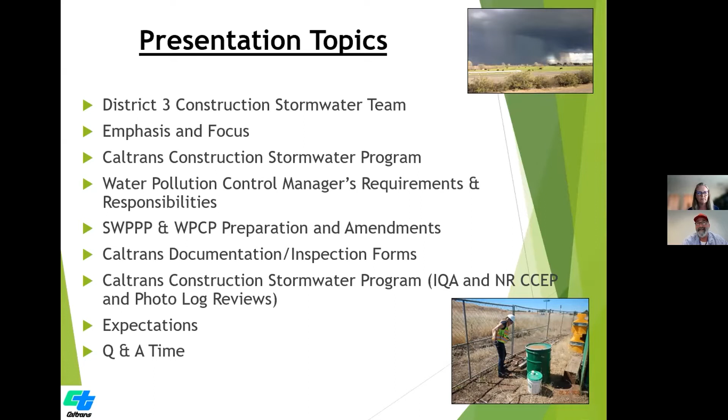So basically, the District 3 team that Dusty runs, Dusty's the boss, La Jefa, is a team of people that all work together, and we look at all projects in the whole district, stormwater SWPPP jobs under the CGP that disturb an acre or more of soil, as well as water pollution control program projects. Now, the WPCPs are under the Caltrans permit and SWMP requirements. So we take the same approach for temporary BMPs as they build those jobs.

But basically, Dusty runs the show. She's been doing it in D3 for a long time. Deanna Arrigo works for SOMAS, and she is the documentation smart sorceress on the computer. So she does a lot of the data entry and uploading in all the SWPPP projects in District 3. Chung Fu does all the water pollution control program projects in this district. I assist, Paige Martin assists doing inspections on projects, and Janet Sager does photo log inspections on the jobs. And those are photos of us in the field, in action.

But basically, the emphasis and focus is that the water pollution control manager either works directly for the contractor that won the job, or is hired as a consultant, as a sub vendor to the prime. Basically, that water pollution control manager, you run point. You are responsible for properly implementing that approved site-specific SWPPP or WPCP for the project.

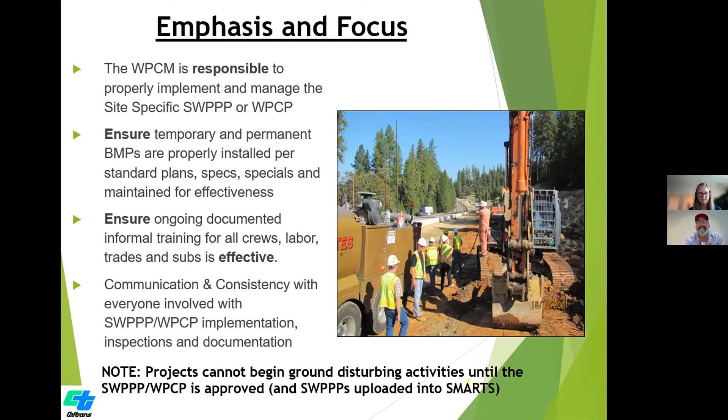Basically, the program is that the resident engineer and the construction stormwater coordinator will review and comment on the submittals. So the contractor won the job, they have to turn in submittals, and one of them is a SWPPP or WPCP, depending on the project. We'll review that and comment on it and do as fast a turnaround as we can so the contractor can get to work. But we want a good site-specific plan.

We will attend pre-construction meetings and go over the water pollution control items and compliance expectations. And we recommend that the water pollution control managers, you guys that are hired by the contractor, attend those meetings as well, that you perform weekly inspections, informal training, and document all the submittals when you do them every week, and that you turn them in to the resident engineer so we can put them into category 20 in good time.

The spec says that when you do a SWPPP inspection, you turn that report in within 24 hours after the inspection is completed. So we say, hey, every week, at minimum, get the packet of all your documentation in, so we can review it and put it in category 20.

Basically, you guys perform pre, during, and post inspections per the spec, per the permit language, to ensure that the training is done and all the documentation is very thorough and accurate and reflective of site conditions. And we need to make sure that the SWPPP or WPCP is properly implemented and amended when required and when needed, ahead of the contractor changing things.

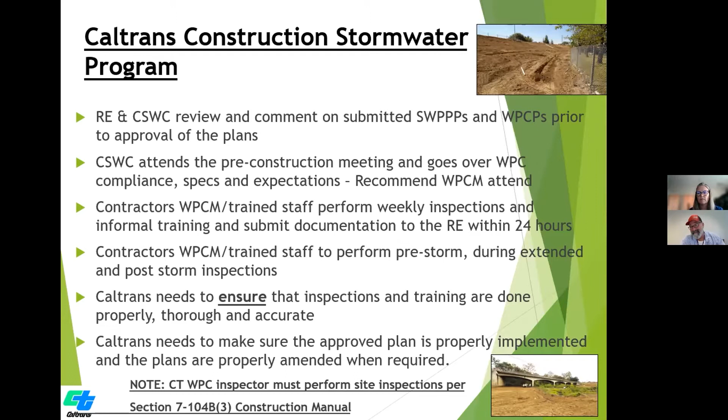The resident engineer will assign an inspector to look at all the items on that project. And one of those items is water pollution control. They're to do inspections too. So we always drive home: get a good working relationship with that assigned inspector on your project and do it together, walk and talk about deficiencies, because they're supposed to review that submittal and then say to the RE, hey, that looks good, go ahead and sign it and put it in the category 20 files.

The most successful projects that we have, it's a collaborative effort. It's the sub or whoever the QSD water pollution control manager is, the contractor, the prime, and our staff and our team that goes out and assists with compliance. And we had a really great team that collaborated well, because it's a team effort. It is, definitely.

Basically, all these bullets are right out of the standard specifications, the 2018 revised standard specifications. The water pollution control manager's responsibilities: basically you have to be a minimum of a current QSP, qualified stormwater pollution prevention plan practitioner, and you have to attend an 8-hour Caltrans certified water pollution control manager training class. So that's new as of that spec.

The revised spec was April of 2020. It's being required on all projects that went out to bid past that date. And so you have to have that. To draft a SWPPP, you still have to be a current QSD, but to be the manager to implement it, you have to be a current QSP as well as have that certified class.

You guys have to read and understand and oversee and implement those site-specific plans. The water pollution control manager can delegate duties, but you have to ensure that you've trained that person, that they've had the 8-hour class as well, that they know what they're looking at and submitting to you as a manager that you're going to review and sign off on that it's true and accurate, then submit it to Caltrans.

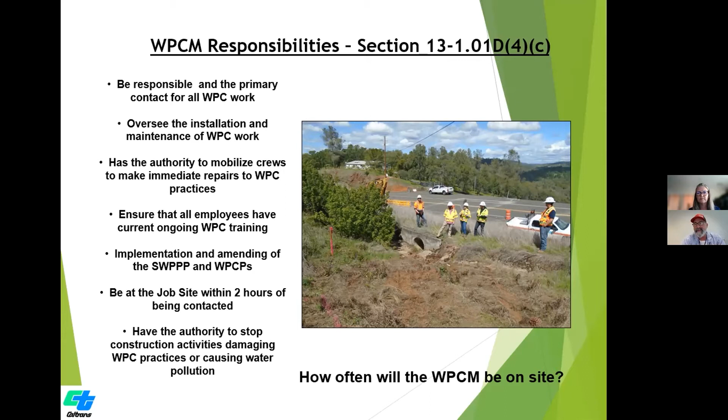Oh, Dave, you muted yourself. I didn't hit anything. Hold on. Maybe it was a cable. You're back. You're back.

Again, continued, understand the importance of permit and contract compliance, timely documentation submitted, reflective of site conditions. All deficiencies are listed and completed in the corrective action summaries within the required time frame. So if you look at the specs, there's a spec on deficiencies and how fast they need to be fixed. The current permit, CGP, says you identify a deficiency, you have 72 hours to begin fixing it and then finish as soon as possible. The adopted new permit does put a definite time limit on it. And in the Caltrans spec and required text of the site-specific plan, it says you have 5 days to correct that deficiency and submit the paperwork to the RE.

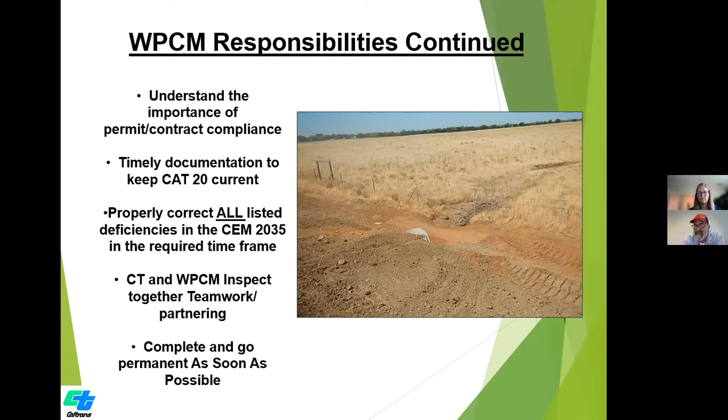And then if they are reoccurring deficiencies, there's your weekly informal training topic every week to drive it home, to raise the bar of awareness on your job site. But basically inspect together with the Caltrans inspector, teamwork and partner, and then complete areas of a job as soon as you can. And if they phase the work really nicely, finish the areas, put the permanent in, and we can submit a change of information to reduce the size of the footprint of that job. Makes it easier. And that's what the water board, the regional boards want to see.

Okay, so the REs have 3-week to 1-month look ahead meetings with the contractor. So go to those, say, hey, I want to go to those meetings. Because the contractor works under a CPM, critical path method schedule, which changes day to day. So they're going to bounce around all over the place. So if a good water pollution control manager goes to those meetings and hears where they're going and how they're shifting gears on the schedule, then they can be there and say, hey, you're going to need these BMPs here ahead of that item and during that item work. So you want to stay ahead of that schedule, the water pollution control schedule.

That's critical, Dave. That's critical for the project to be in compliance, especially as it's growing or shrinking, that the prime is keeping you as a water pollution control manager informed of where their next site or next location or next activity is going to be, because many times there should be perimeter controls or things in place before they go in there and start creating DSA. And sometimes this is one of the areas that could use a little bit of work. So that collaboration again is really critical.

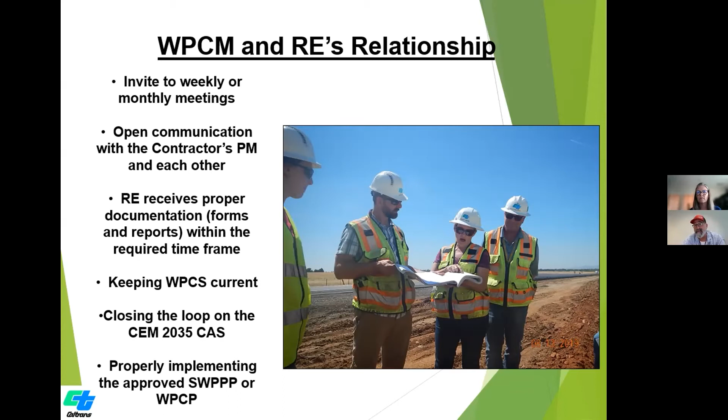You have to gain a real-time relationship with the resident engineer, with the Prime's project manager, and the assigned Caltrans inspector. And then use us as a resource. You know, we're there to help because we do inspections monthly on those SWPPP jobs. We're a resource, but definitely go to your water pollution control manager first. Yeah. Sometimes there'll be a little bit of skipping.

So we're here to help, even though we do inspections and rate a green, yellow, or red rating on a job. We're here to help. And sometimes there's some complex challenges, and so it requires us to step in and assist with coming up with that plan, right?

So if you're a water pollution control manager for a Caltrans job and you're drafting a site-specific SWPPP or WPCP, use the latest manual. Caltrans has a manual for everything and forms for everything. You get on their website, use the latest one. It's the October 2016 manual, but the templates are updated. The latest SWPPP template is March 2021.

It's Microsoft Access. You need that Microsoft Access software 2007. The new WPCP template is in both Access as well as FileMaker Pro 12 program, and that is June 2021. So there's the website link. Get on there and download the latest manuals and download the latest templates to use to draft your site-specific plan.

The WPCP template, we have new boilerplate templates for certain types of jobs, a chip seal overlay, electrical work only, or paving overlay. There's 7 boilerplates and they're on the website. I think my next slide shows you those. But the WPCP is for anything that disturbs less than an acre of soil. You have to use the WPCP template.

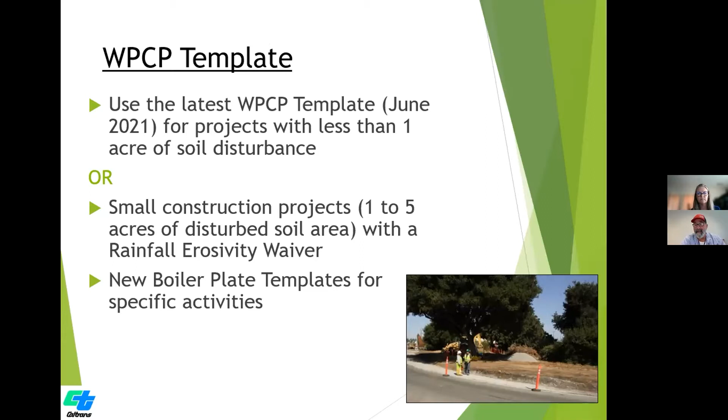Or if it's a job that disturbs 1 to 5 acres and it's one season, it's nowhere near any receiving water, and it can apply for an erosivity waiver through SMARTS and gets accepted, then use the WPCP template. And then here are the latest boilerplate templates down at the bottom of the slide. If your job is just pavement overlay, use the boilerplate WPCP. A slurry seal, chip seal, use the boilerplate template.

Striping, these photographs are for a striping project. Just use that boilerplate template and pull it up and insert your site-specific information, and it speeds up the process of review and comment so that you can get to work right away. And these are new. So they're June of 2021.

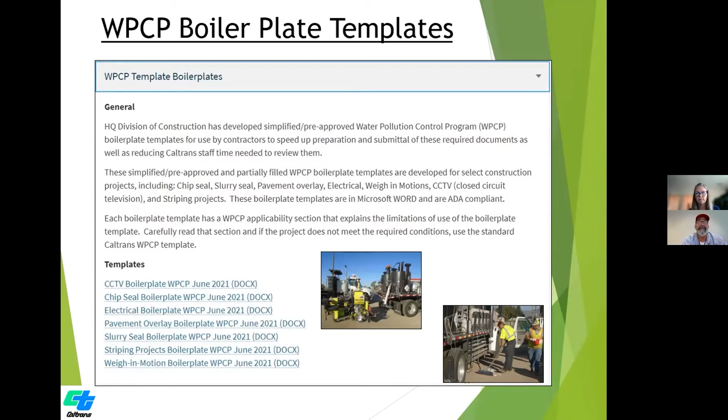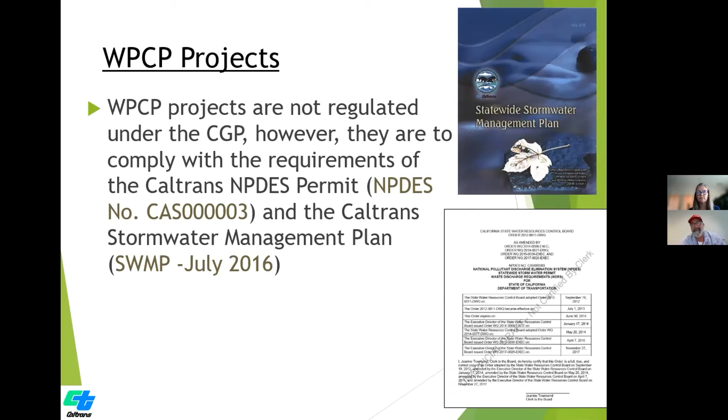Water pollution control projects, they're not regulated under the CGP, the Construction General Permit, but they are regulated under Caltrans' own NPDES permit and Stormwater Management Plan / program for the whole state, as well as any potential other regulatory permit, a 401 certification, a Fish and Wildlife Streambed Alteration Agreement, or an Army Corps permit. Or if you're up in Tahoe, a TRPA requirement, agency permit. So know your contract documents and know what every permit applies to your project.

So basically, the SWPPP, what we see is common deficiencies. When we review plans, we see they're not site specific. There's not detailed BMP narratives. It should be a standalone document that you can give to someone that knows nothing about temporary BMPs, and they can read the narrative and look at the drawing and the fact sheets and reference material to say, okay, I know where this goes. I know what it's for.

So you always want to take that who, what, when, where, why, how approach in drafting site-specific BMP narratives for that job site. Reference the drawings, cross-reference it. Everything should run smoothly through that plan. Include verbiage from the BMP fact sheets and the standard specs, but use it and massage it to be site specific to that job. So cutting and pasting is fine, but you got to proofread it before you submit it. All right. So make it site specific, but yeah, definitely do that.

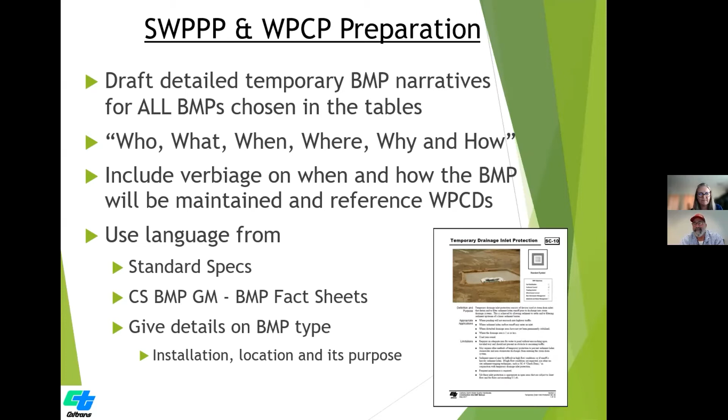And so that it minimizes the amount of comments and the turnaround time, because contractors just really want to turn and burn, basically. Let's roll. So cross-check that information from section to section. Detailed narratives, we can't drive that home enough. But yeah, definitely review it.

Use the buddy system if you're drafting it with someone that you work with to read it, get more sets of eyes on it. And then you're going to turn that into the prime. Tell the prime, hey, read it before you give it to the Caltrans RE to see if we've missed anything. So we can't stress that enough.

So more common deficiencies is your certification, the QSD that drafted it. They put that in an appendix and it's expired. So you print out your current certifications to submit with those plans. Use the proper template. Use the most recent template because you don't want to do all this work and then the first comment gets kicked back and say, well, put everything in the most current template. So you want to make sure you use that.

We don't like to see things to be determined. No, you're drafting it. You determine it now, and then it can be amended. You make the decision, you commit to it. Then as they start working, amendments can be made to these living, breathing document plans, both SWPPPs and WPCPs.

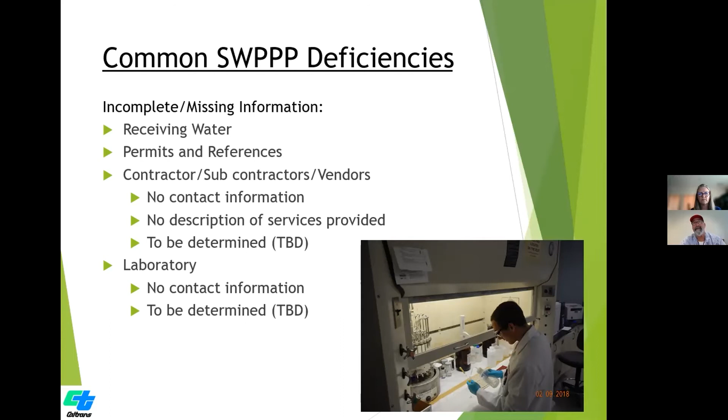It doesn't identify all the BMPs that were selected, or it talks about BMPs that aren't even related to the project. So if there's work over water, but it's a chip seal overlay job and there's no bridge anywhere, right? So again, cutting and pasting is fine, but proofread to make sure it is site specific and go through those special provisions and all the items of work and what temporary BMPs relate to those items of work

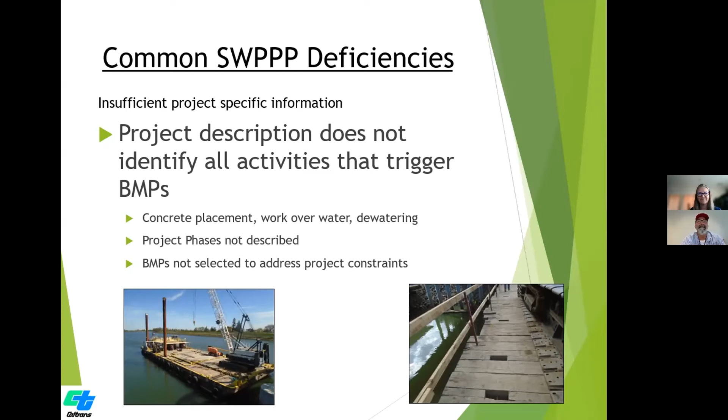and make it very site specific. Because we've seen it all over our 20+ years of reviewing plans, the jobs in District 3 up in Tahoe area or in Truckee, but yet they're referencing a weather station in LA. And we've seen it. So basically, make it good and site specific. And there's some pictures of work over water.

Schedule, make sure the schedule, okay, in the SWPPP and the WPCP sections of those plans, it describes what is needed in the schedule and in the drawings. I think it's section 500.5 of the SWPPP and 500.6 of the WPCP from my memory of what needs to be in those schedules and drawings. So we review those and make sure the schedule has everything. Work windows from other permits, start dates, end dates, BMPs, all the items. If you use a critical path method schedule, you can tweak that to add the temporary BMPs along with those items.

Can I say real quick, Dave? Yeah. One thing, you don't have to tweak your CPM to do that. We in District 3 have a pretty scaled back version of that we offer to anybody that asks to get a schedule, because sometimes the BMPs get lost in all of the items in a CPM or something like that, and they can get skewed and moved around. So if you guys work in our area, we have a very scaled back version that you can utilize that is very specific to BMPs and stuff. Yeah, and there's all forms that we've seen, but I was just saying, if you use that to tweak.

Yeah. But definitely we want a good schedule, an accurate schedule, start, end dates. Again, you guys as managers drafting these plans, especially SWPPPs, for the risk level determination. If the schedules change and blow out, it could kick you into a different risk level for SWPPP jobs.

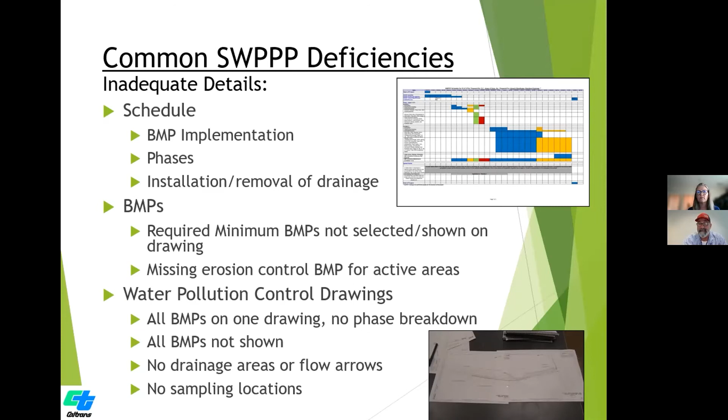If you guys have to use an off the right of way staging area or yard solely for a job, before that happens, you need to submit to the Caltrans resident engineer a written authorization from the property owner to the contractor, allowing the contractor to use the private property and holding Caltrans harmless of any and all liabilities before it happens, before they use the staging area.

So basically for deficiencies, we see a lot of generalization. We don't like that. In general, depending on, to be determined, a BMP narrative is one sentence: we're going to do this per fact sheet WM5. Done. So no, we want more site-specific narrative of BMPs.

And a big one is "as directed by the RE." We see that a lot. No, as directed by you, the Water Pollution Control Manager, because if you didn't draft it, you're implementing it. So never write in a plan "as directed by the RE."

The contractor won the bid and they're going to build the job how they want to build the job to the contract document. The only time Caltrans, the RE, directs work is under force account. And those are emergency jobs, and very rarely do we do work under force account. Right, Dusty? Correct. All right.

So basically proofread before you submit. Make them site specific, proofread it, have many sets of eyes on it after you're happy with it if you're drafting these. Check that you've chosen all the BMPs against the special provisions and the bid items, and that all the tables in the templates that you've checked have a narrative for it. Draft detailed narratives. Discuss maintenance of the BMPs in the narrative, but be site specific.

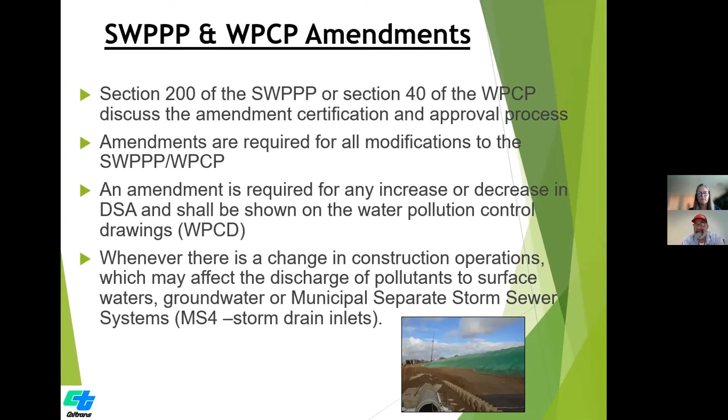Here's some examples. Adding an equipment, storage, or laydown yard that's new, it has to be amended before it happens because Caltrans Environmental needs to clear it, right? So archaeological, bugs and bunnies, they need to say, okay, you're good to go. Before it happens, because a lot of times it happens and they're like, oh my God, there's the Douglas iris or the red-legged tree frog you just squashed, right?

We don't want that. Adding or replacing subcontractors, replacing a water pollution control manager, adding new BMPs that you thought you didn't need, but now you're going to change a BMP, add a BMP. Changes in amounts of disturbed soil area and locations, and moving sampling locations. We need amendments.

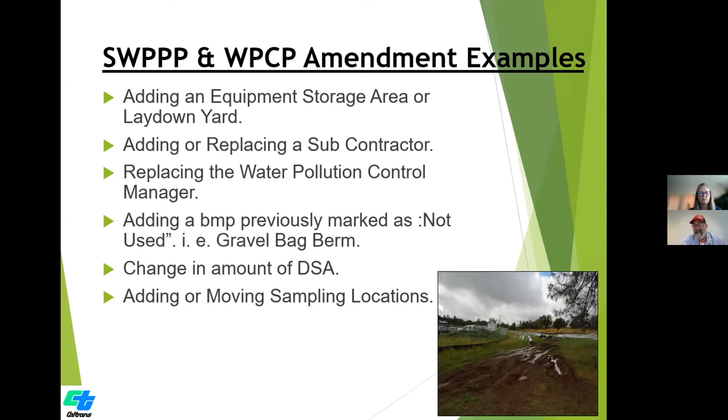So that's a process that you want to do before. So go to those monthly look ahead scheduling meetings. You're going to find out where they're going to go and where they're going to work, so you could be ahead of an amendment for sure. That's another good reason.

Or at a minimum, have your prime send you the look ahead schedule so you can peek at it and have questions. A lot of times it's in-water work, summertime stuff. It's a lot of in-water work, dewatering. Some of those things need extra permits too, so they take time.

And then you have an amendment CEM form. We have a form for everything. So you're going to do an amendment log and a CEM 2008 and 2009 form, get those submitted, reviewed, and commented on before it happens in the field. You need to amend it in writing before it happens, ideally, or we're playing catch up and we're surprised in the field when we go do our review.

But if there's an imminent threat of discharge, then a verbal approval is required, and then the paperwork can follow if you need something to happen right away. Right, Dusty? Oh, sorry, I was just seeing the question.

A discharge to a DI would require an amendment? Technically, we shouldn't be discharging. Well, wait, I'm not sure about this question. A DI that wasn't already listed is protected in a project footprint, and it's potentially a new location? Yeah, in that case you would add it, right? Yeah, because currently in the drawings and in the plan, you're protecting drain inlets that would be shown on the drawings, and then you're cool. But if it's a new area, a new system that wasn't there, then yes.

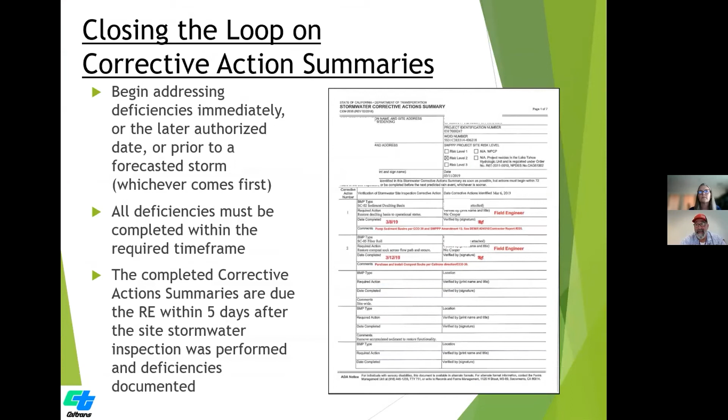Thorough, accurate, and reflective. But basically you're dating when the finding was observed on the inspection, and you want to close that loop, sign off that it's been fixed within those 5 days or prior to a forecasted rain event, whichever's first, which is in the Tahoe permit and spec language as well. And I think the new permit's going to state that as well.

Again, you look at weather, look for potential discharge. As a water pollution control manager, you're going to prioritize your deficiencies and getting them fixed, taking into account the time of year and the weather, and is there a potential threat of discharge? And remember, no carryovers. If you fix it, but then you start seeing the same issues, there's your weekly informal training topic to drive home to the labor and the trades on the job to say, hey, you guys aren't getting this.

Let's get it together. Hey, Dave, can I interject a question? I actually put it in the chat, but I know in the ideal world, we don't want carryovers. Yeah. But sometimes the fix is going to take longer. Sure. They need to get the erosion control contractor out there to spray something down, or there's a scheduling issue, or there's other things preventing it from happening. So it is quite common. We see carryovers happening. So how should the numbering work? How does that CEM 2035 work?

Okay, John, that's a great topic and a great point. Document that. So if something like scheduling, this needs to be sprayed and stabilized, and this subcontractor is booked and we can't get them out until this date, you write that down to say this is on the schedule to be sprayed at this time, right? So then like, okay, we're cool with that.

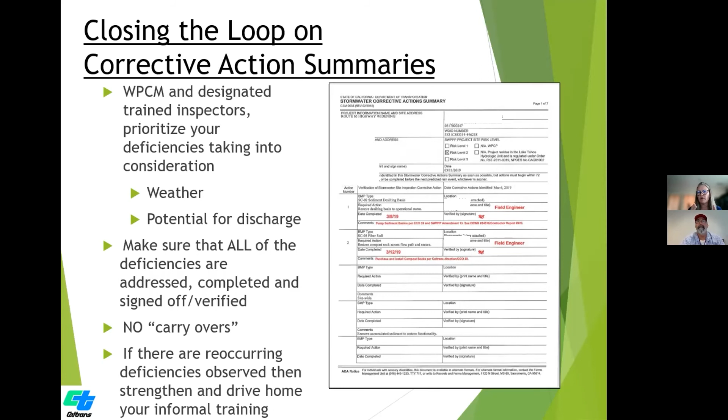I don't want to pigeonhole you into something, you know what I mean? So I just encourage you to talk with that group and you guys come up with a plan that works for you guys. That way it's flexible. Right, and so that could work, keeping it the same number or doing something different and changing the number. Yep. And sometimes on these big jobs, they'll do like a month and a finding for that month. And then you can track it that way. Thank you.

So basically Dave, you had one other question. I don't know if it's okay if we answer them as we go. Who signs the corrective action form? Walter. I think Walter works for us, if it's the same Walter. He's probably coming from a slightly different perspective because they do encroachment permits. But for what we're talking about under the CGP, that would be the QSD and the water pollution control manager. And then the RE would sign off when they agree that they're complete.

And the contractor. Yes. Is he on there too? I can't remember because there's so many different signatures. Yeah, usually the signature page will have the resident engineer sign, the contractor, and the water pollution control manager. But they all have to be signed. And it's funny because all these CEM forms have the instructions on the last page, not the first page. So go to the last page, read the instructions, and then fill out the CEM if you have questions.

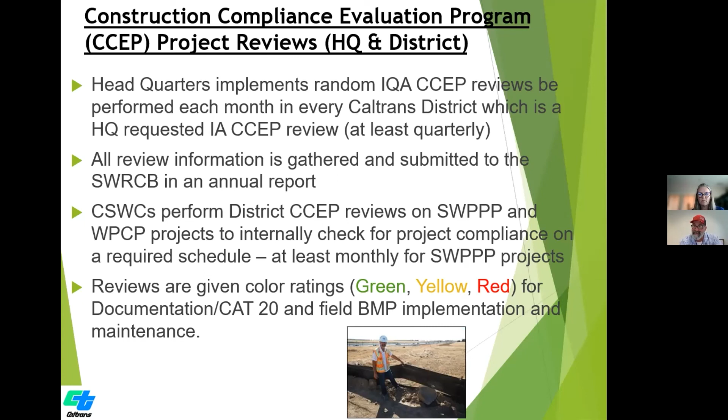So when you see us out there and you get a red, yellow, green, we're looking at the document review and the temporary BMPs, and we inspect to the standard spec and plan, T drawings, the permit language, and the contract documentation, and we reference it. This is out per this. This isn't maintained per this. And you guys should inspect the same way, inspect to the contract language.

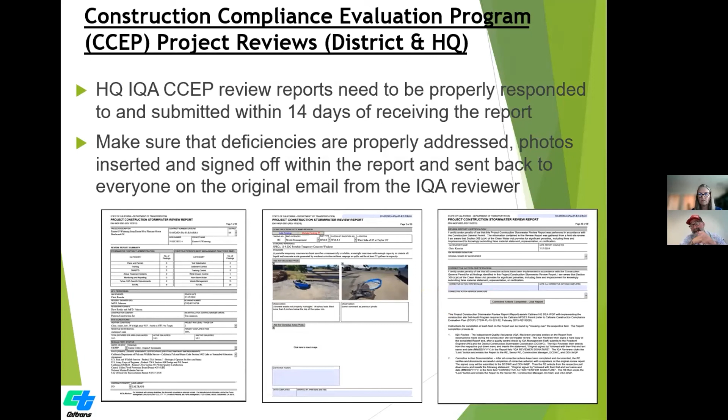And this is headquarters IQAs. So when we do it, you have 5 days to fix it. When headquarters comes out and does a review, they won't give you a red, yellow, green. They'll take a picture. They'll say this finding or deficiency is out per the permit language or the spec language. You have 2 weeks to take a picture of the same vantage point and turn it in. You put it in the report, and the RE has to turn it into headquarters. And I do those in districts 4, 1, 2, and 10.

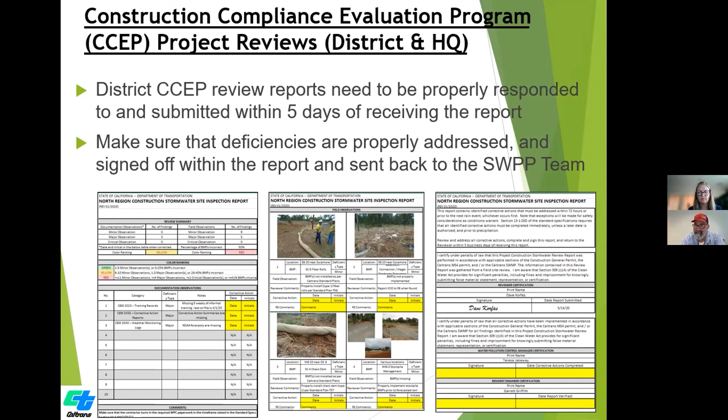And so here's our review, our CCEP report. You'll see documentation as a yellow, and then the field implementation and temporary BMPs as a red. But we list them and we take pictures, and then we reference the permit language or the spec language or the T drawings.

And real quick, everybody, that's something that mostly I think districts 1 through 4 do. That's kind of something that we do specifically. Other districts may do it in a little bit different format, but they should be doing some sort of an inspection. Yeah. So basically, the North region is districts 1, 2, and 3, and District 4. We're very similar with that form. But SoCal's different. But they're supposed to be doing it for the permit.

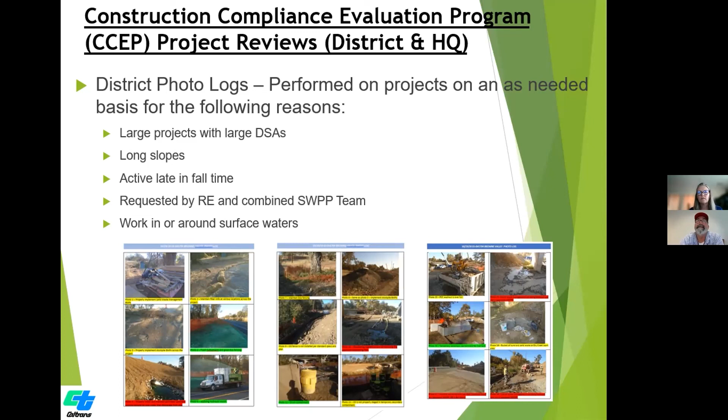Photo logs are for projects, Dusty, that are SWPPP jobs that the RE might require us to come every couple of weeks to take pictures to see how they're doing. And we also do these for notice of termination on SWPPP jobs too. When the job's ready we have photos to submit for NOT. I think it's something a little unique for District 3, and we utilize it for projects that have a little higher risk or are very active getting into the fall and winter times.

Expectations: you guys are water pollution control managers. You're going to be water pollution control inspectors on these Caltrans projects. Use us as a resource to help you, because we want all the jobs to be very good, safe, clean, on time, on budget, and in compliance with all applicable permits. Use us as a resource. But here's what we expect from you guys.

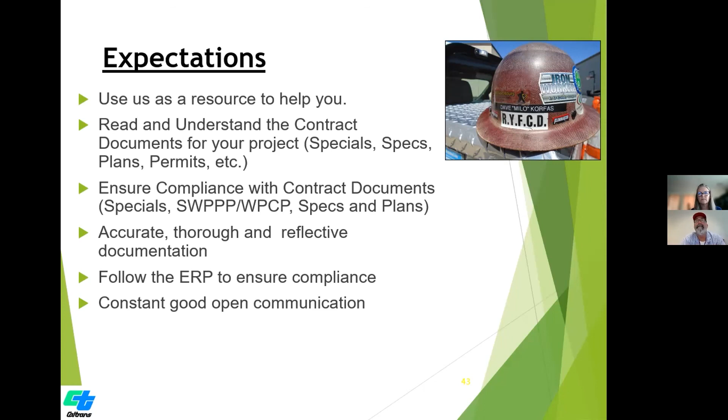Read your contract documents, inspect to that standard and language, ensure compliance, have site-specific plans. All your documentation is accurate, thorough, and reflective of site conditions. When jobs get sideways, it's Caltrans' responsibility, the RE, to ensure compliance through an enforcement response program. But we want consistent, good, open dialogue and communication in real time between the teams of people with water pollution control on each job. So RYFCD: read your friendly contract documents, and you can use whatever you want for F, but read your contract documents and inspect to them, and you're going to be fine.